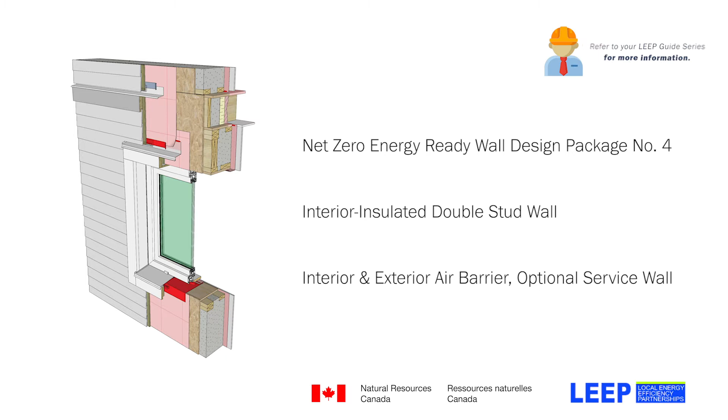So these guides, along with good process, all of a sudden, high performance is easy.

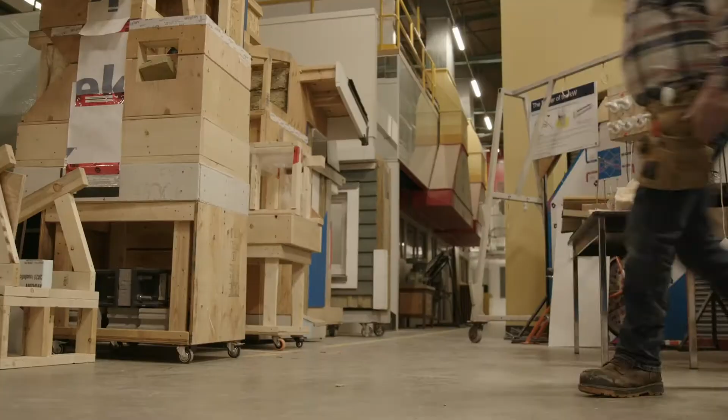You know, this rethink towards net zero is rethinking a lot of the traditional building enclosure assemblies and building them better. I get excited, but I also get depressed. I'm depressed because I'm old. And if I was younger, I would embrace this opportunity for this change. I see the young builders, and to me, I get excited for them.

Morning. How you doing, Graham?

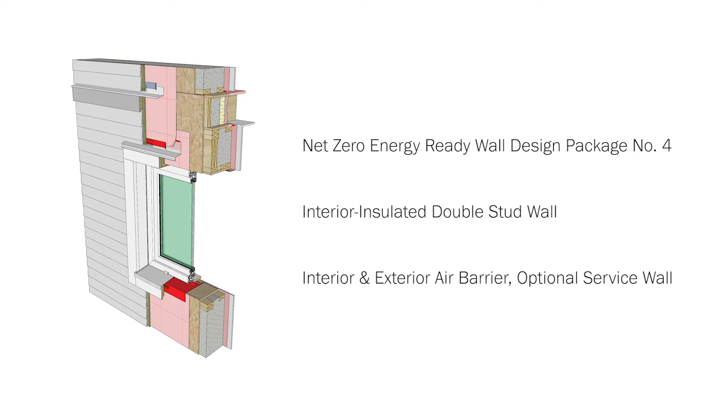All right, James, what we got here is LEEP wall number 4. And LEEP wall number 4 is a deep or double stud wall with cavity fill insulation, no exterior insulation in this application. And the way we're getting our R value towards our net zero targets is we're making this wall fatter and fatter and potentially adding in a service wall, an additional wall on the inside.

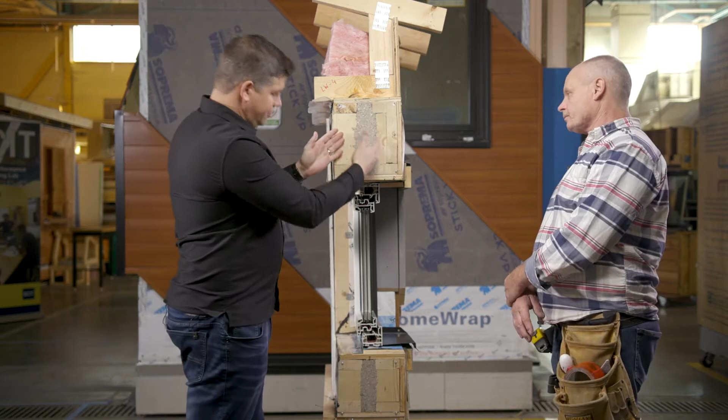So the traditional approach to this double wall is 2x4 framed walls. The cavity is filled with insulation. We'll get into the insulation, and you leave a gap between the two stud walls to get your R value. So you need more R value, you just increase the gap. Sure. And so when you imagine this during construction, you've got double wall framing. It's going to be very difficult to cut and fit in batts, just from an installation standpoint.

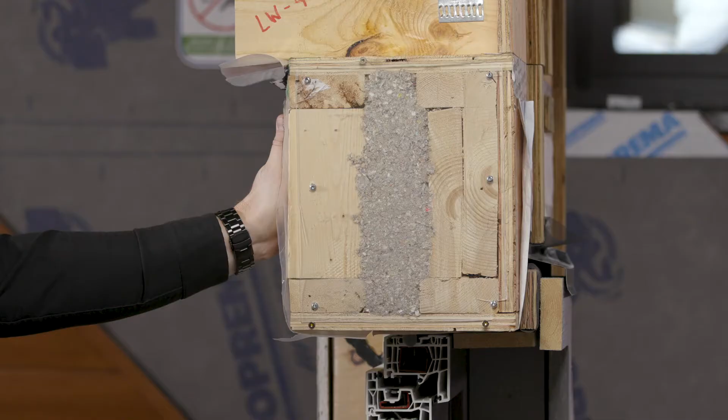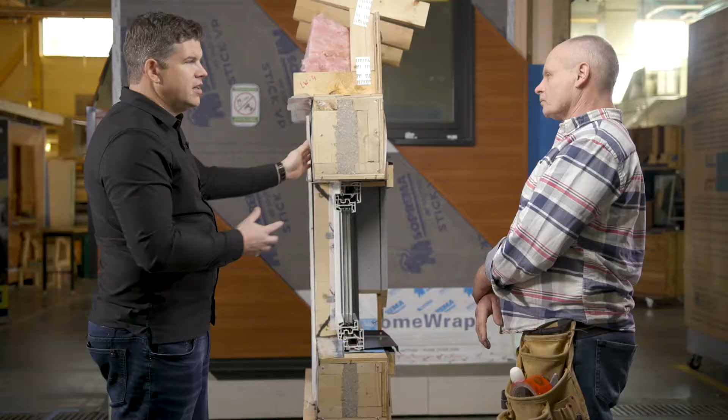So typically this cavity is filled with dense pack cellulose. You can use dense pack fiberglass, you can use open cell spray foam, or all sorts of variants of this. But with dense pack cellulose, you're packing this into this wall assembly here, usually 3.5, 4 pound density to get enough density so that it doesn't settle in this cavity. Yeah. You can see here we've got a cutaway showing the cellulose packed in for this mock-up. That's friction on the side, just on the density.

Yes, you need to be tight, and it should be as tight as your mattress. I mean, this is not quite tight enough here, and if this mock-up were to sit for a long period of time, that insulation would probably settle down.

Yeah, I'd need a new mattress. Yeah. You'd be sleeping on the floor, yeah.

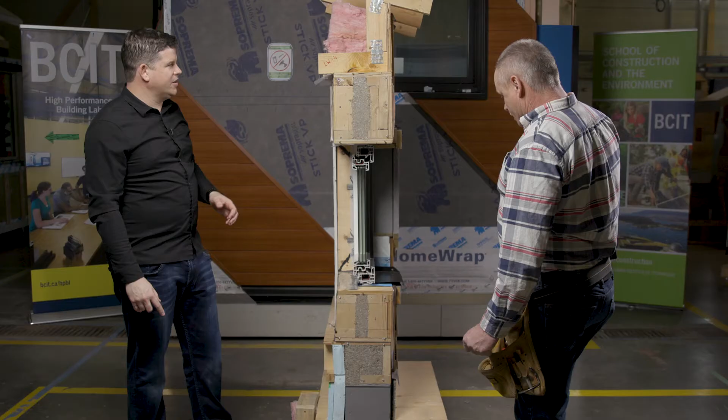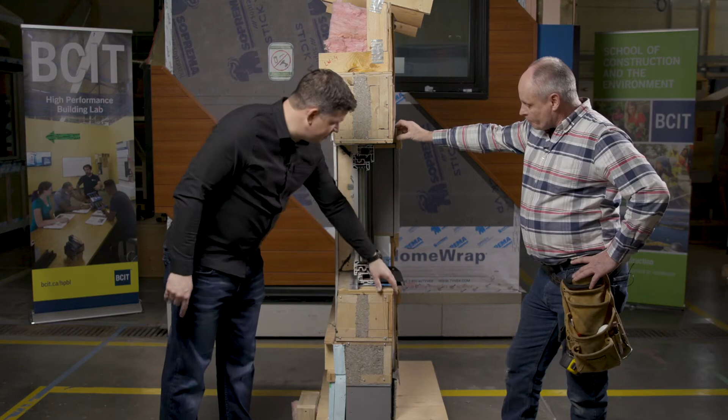James, we're at wall 4, and just wanted to clarify some of the questions about air and vapor barriers with a double stud wall. Good idea. Yeah, so traditionally with a framed wall, we put the air barrier and vapor barrier on the inside. And it's no different with a double or a fat wall, right? That's been our past program. Yeah, and although in recent years, we've started to use more modern approaches with exterior air barriers, right? Agreed. So house wrap. Agreed.

Now the risk with making the house wrap the only air barrier in a double wall is that if air gets into this deep space and it's really cold in here, then we can get condensation. And so in a lot of these double walls too, we have cellulose. Now, typically cellulose, we try to get in at 4 pounds a cubic foot. What's your experience getting that cellulose tightly packed into everywhere though?

I find it, and it goes to a basic principle. My experience is the densities are inconsistent, okay? Yeah. The principle that I try to work and live by is everything I do is in front of me. This is a blind install. Yeah. You can't see what you're doing. So you're relying on a density test after. You don't know if it gets hung up or what's happening inside that wall assembly.

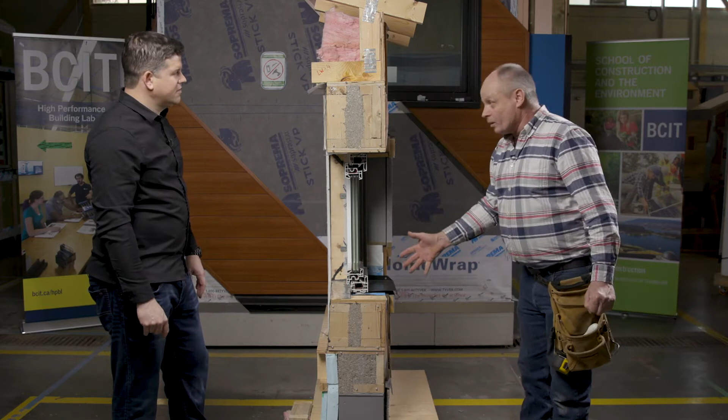It can and has been done successfully for me also. So don't get me wrong. I've had success. But the last job came in at 2.9 and I asked for 4. And I was like, okay guys, it didn't really quite work out. It's very important that we get a good dense pack for convective looping purposes. You can talk about that, convective looping. That's something I read in the guide.

Yeah, so with these deep walls with fibrous insulation, there's the risk that, with cold air falling in the sheathing and warm air rising on the inside, we're going to get this looping inside these wall assemblies where it can bring with it moisture. And so it's important to have interior air tightness.

The other thing the interior air barrier in this case is also doing, this is plastic. We're using polyethylene or potentially a reinforced polyethylene, another product here on the inside. This is also performing the function of our vapor barrier.

So it's the same as before. It's an air vapor barrier. And it's only an air barrier because we're doing a really good job of detailing. We're going all the way from our foundation. We got styrofoam on the inside of our concrete wall. We've taped all the joints. We've taped the joints in our rim joists. We got the transfer through the acoustic seal to the poly into our windows and tying into our window frame here. That's fine, but my experience is that's also difficult with all the amount of penetration on the inside.

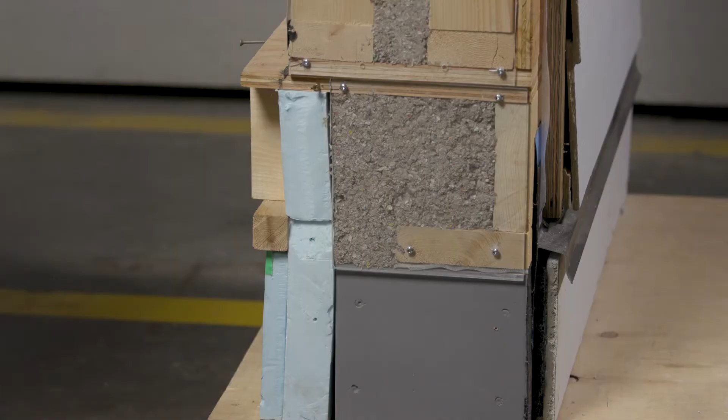What else can you do? That's if you want to make it simpler. Yeah, and what we're really seeing with a lot of the higher performance double walls, with passive house and net zero projects, is in almost every single case, builders build a third wall, a second wall on the inside, or a service wall, right?

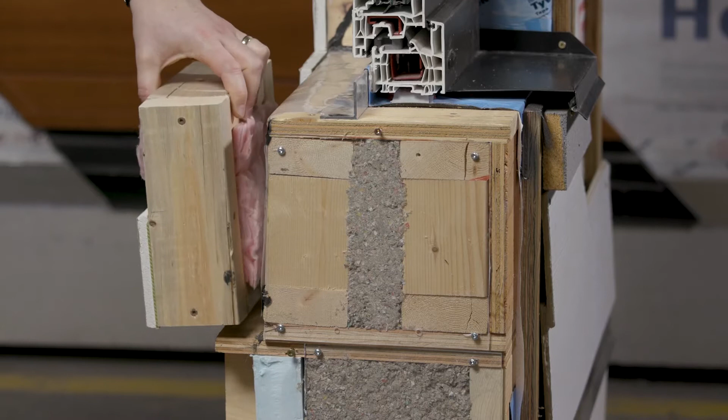And the idea with the service wall is your air vapor barrier is left here. And a 2x4, 2x3, even 2x2, it could be vertical, it could be cross-strapping, could be whatever, essentially built on the inside here. You can put a bit more insulation for R-value, why not? But you run all your services in here, and the air barrier doesn't even get touched. Well, that's a good idea. I suppose you could put OSB or something here also and keep it in hardboard, or is that necessary?

Yeah, actually, a lot of builders are also looking at alternates to plastic, right? That's why I asked the polyethylene question. That's what I'm hearing. It hasn't served them well, so they look at OSB as a rigid air barrier for higher performance, and it can seal up and detail really well. OSB is really unique in that when it's dry on the inside, it's a vapor control layer. It's a vapor retarder. It's about a perm when it's dry. And most OSB is actually airtight, or airtight enough. Well, that's good. So tape the joints and we'd serve what we need. Yeah. Thanks. I appreciate that.

The concern that a lot of builders have is, well, if I have sheathing on the inside, why do I need sheathing on the outside? The way this wall works to get your R-values is you increase the thickness. You look at the type of insulation, and in the LEEP guides, we've covered different types of insulation and gaps. If you want to even use 2x10s or 2x12s, or if you really wanted to go crazy, you can use that as well. And we'll get into some of the details later on.

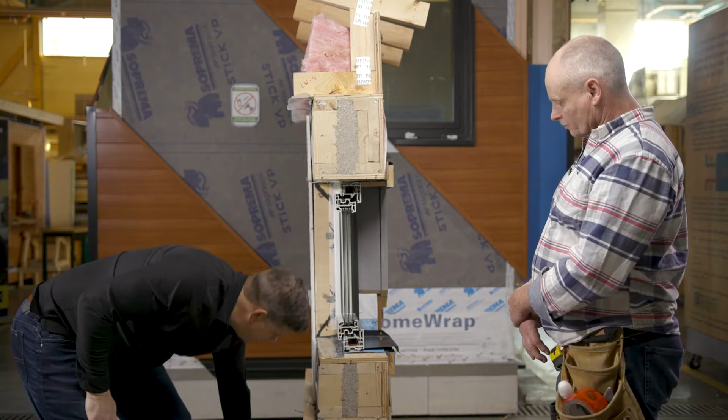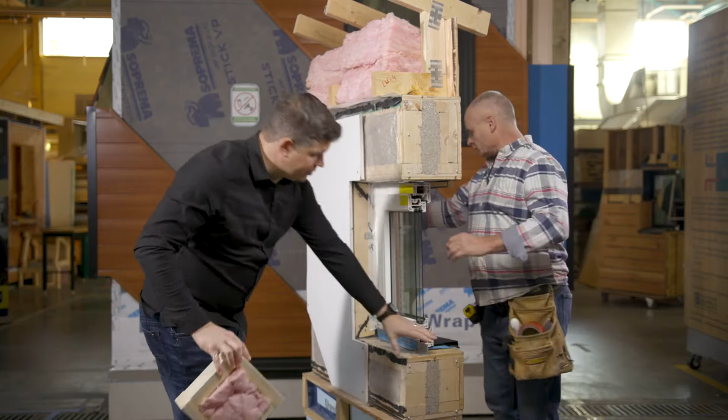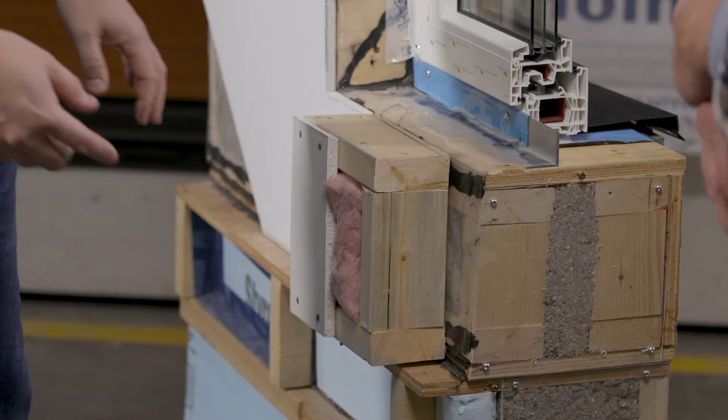One of the other ways to increase R-value is you build a service wall on the inside of this wall. So if we look at the detail here, we got our double wall. And so we got, say, R30 here, and we need another R10. We just build another wall on the inside here, and we get R10 on the inside. And all the services run here, so we don't affect any of the air barrier. Yeah. Or minimally affect the air barrier.

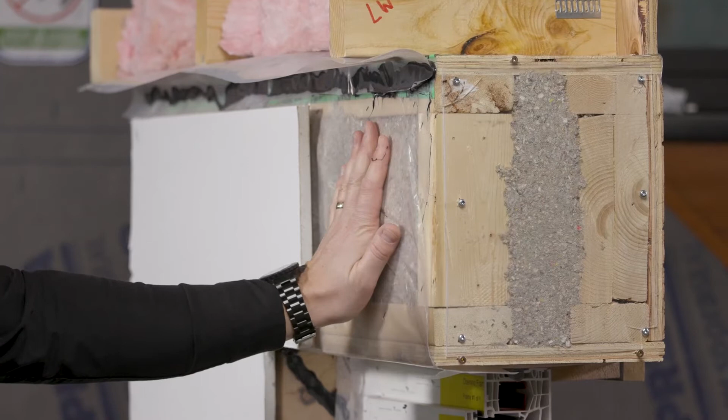Yeah, let's talk about the air barrier penetrations. There's an interesting air barrier approach here. Yeah, so with our deep walls in Canada and the cold climate, we need some degree of air tightness on the inside. We can put the air barrier for the building anywhere: on the inside, the outside, somewhere in the middle, a whole bunch of different locations, right? The common approach with the deep walls, you want to get a primary air barrier on the inside.

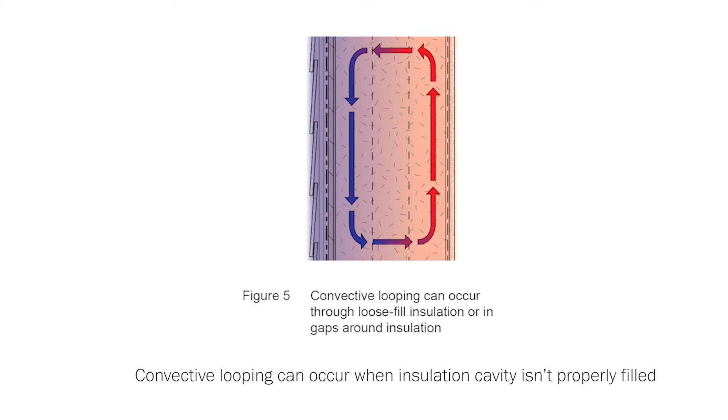With a deep wall you don't want warm, moist air getting in and convecting. The air will flow through this, hot air rises, cold air falls, and you get convective looping inside these deeper walls, especially if there's gaps in the insulation. So you want an air barrier on the inside of these wall systems, so you're managing that air flowing in there. Wouldn't a dense pack itself prevent that convective looping, if you manage to get the density everywhere? Definitely. Yeah, and one of the reasons people use dense pack cellulose is it does fill all the gaps.

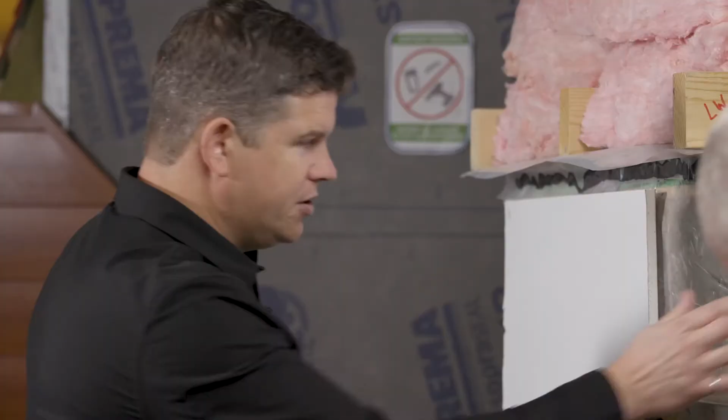If you're using batts and you're shoving it in there, you're going to end up with some gaps. And those gaps are bad to the performance thermally, but also from a moisture standpoint. Yeah. So with the air barrier on the inside, one of the challenges, as you know from traditional construction, is you've got plugs and other penetrations and outlets through this wall. Lots of them. Lots of pot lights in the ceiling, right?

And so one of the strategies we've seen quite successful is you keep the air barrier there, whether it be polyethylene, reinforced polyethylene if you're blowing in behind cellulose, or smart vapor retarder in some cases. There's a whole bunch of different products you could use here. But you're going to use a blow-in system that's conducive to the mesh or poly or whatever you're using. That's right. Because there are different ones, right?

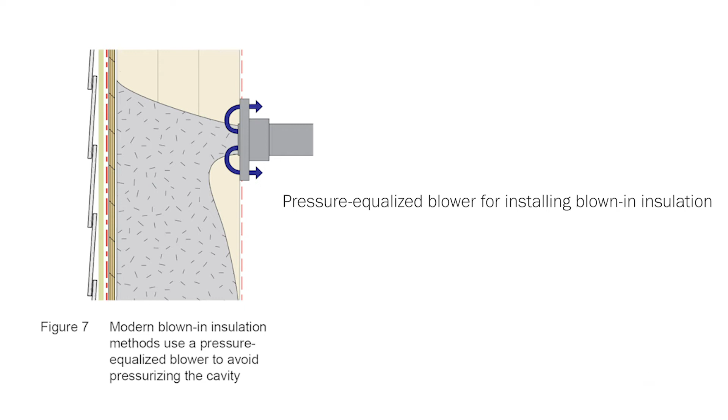That's right. If you're blowing in cellulose, traditionally you need a mesh here. It's air permeable. You blow it in, and then you have to put another poly vapor barrier, air barrier, afterwards. There are systems now that allow you to blow in. They basically neutralize the pressure, so air release at the same time as blowing in, so you can use something like this or maybe what we'll talk about down there. That's right. And so the polyethylene's a good air and vapor control strategy for this wall.

Right. We also see a lot of builders using OSB or plywood sheathing. OSB or plywood sheathing, when they're on the warm, dry side of this wall assembly, actually function as a vapor retarder. They're actually smart vapor retarders because the permeance varies with humidity. That's right, and actually on the outside, it's quite vapor open, but if you use it on the inside, it closes in, right? And so we see a lot of walls where you use OSB or plywood instead of the polyethylene as your vapor control and your air barrier.

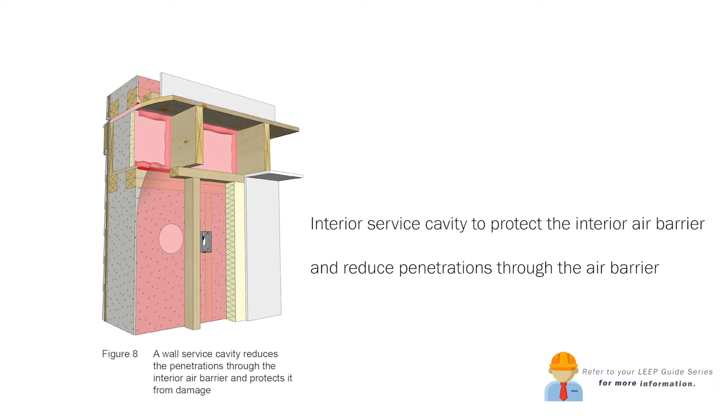So one of the ideas with the service wall is you've got all your insulation in here, and then for all your services, plumbing, you don't even need to run your plumbing through the interior walls. You can run it through the exterior walls if you wanted to. All your electrical outlets, everything, you plug it into this wall here, and the air barrier is now protected by this service wall. Yeah, right? Except for the occasional penetration, which you can then detail. That's right. So that's the idea here.

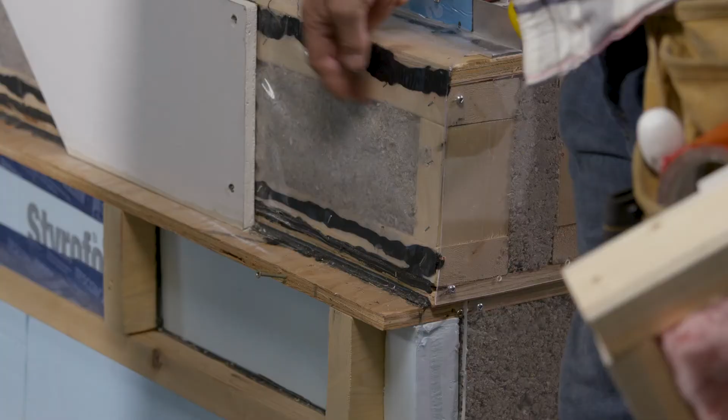So when you're looking at this wall assembly overall, the R per inch of the cavity insulation is lower than the rigid insulations we covered with the other walls on the outside. This is 3 to 4 per inch. I noticed something on the inside here on this mock-up that I think shows a couple of different approaches, where we clearly see the interior air barrier coming through and connecting to the window, to the plate here. But down on the service wall, we also see a compartmentalized approach for this area here. Can you explain what the concept is? Is that to help reduce the potential for convective looping?

So for this wall assembly, to get the R value you need, whether you're building in Winnipeg, BC, wherever you are, you're going to be adjusting the depth of this wall. Typically the R value per inch of fibrous insulation like cellulose and fiberglass is 3 to 4 per inch, maybe a bit more than 4 for some of the high density products. And so you can do quick math to figure out, if you need R40, what that thickness is going to be with all the thermal bridging and everything in there. So these walls tend to end up being pretty fat for higher R values.

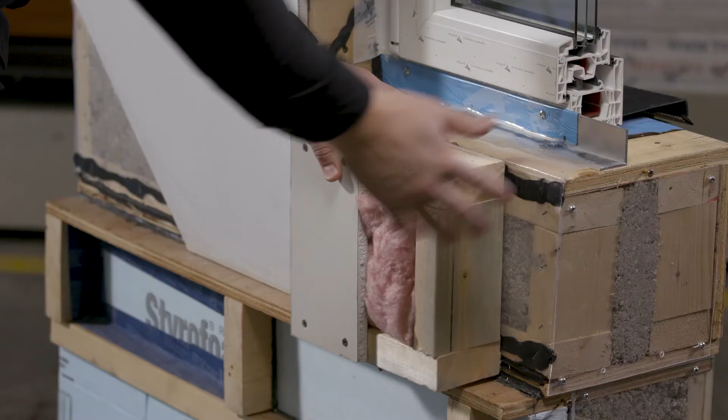And so when you think about the service wall and other cavities, you end up with a fairly thick wall. What you're trying to do is minimize the amount of thermal bridging through all the wood. And that's why you tend to have a gap between your double walls there. And then the service cavity wall here will be pretty lightly framed. You don't need all the extra framing since it's not supporting the rest of the wall. And the inner wall can be like 24-inch centers, as long as the openings line up and everything like that.

Yeah. And this would be your structural wall on the outside. Yeah, that's a good point. Yeah, so typically the exterior wall, the exterior framing, I should say, is your structural wall, and the interior is tilted in after. Right. And using the plywood as your plate connections. That's right. Between the two walls.

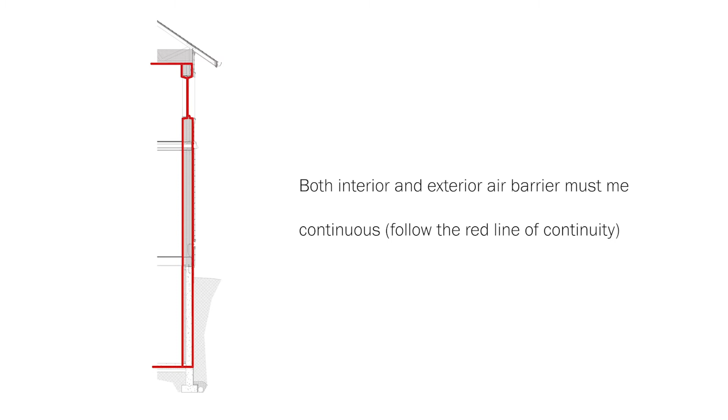Yeah. So on the mock-up here and then the guide, we talk about 2 air barriers. And the reason we've shown 2 air barriers is we want interior air tightness. But we also appreciate that a lot of builders are getting really good at building exterior air barriers really tight. So using the house wrap or the sheathing as the primary building air barrier. And this is really in the inside for your walls for keeping that convection from happening, but also could form part of the overall strategy.

So what you'll see in the details is you've actually got exterior air barrier details here and interior air barrier details. So we're going to go spin this around. So on the outside of this wall assembly, to a builder, it looks exactly the same. You wouldn't know looking just at this what the R value is in behind here. And so one of the benefits of this deeper wall system is on the outside, and what we've got shown here is a rain screen wall system. On the outside, it's pretty traditional.

We're showing a rain screen wall in the LEEP guides for moisture reasons. Right? The main reason is we want to provide a bit of extra drying capacity here. When we add more and more insulation on the inside, that sheathing gets colder and colder. Sure. And so it's at risk of condensation from air leakage or vapor diffusion. So we want to have that outward drying capacity.

But also if we get rainwater leaks, say around a window flashing detail, that rain screen space and the cavity and the airflow and the drainage that's provided, which is common in wetter parts of Canada, provide that benefit. So when we switch to these deeper insulated walls, we're going to see a lot of the time rain screen type cladding attachment or systems. Which makes sense. If you increase the risk of something, then you should provide something that can manage that risk. And so if you can have potential moisture or issues of condensation, you put the rain screen on. It's really quite simple to do.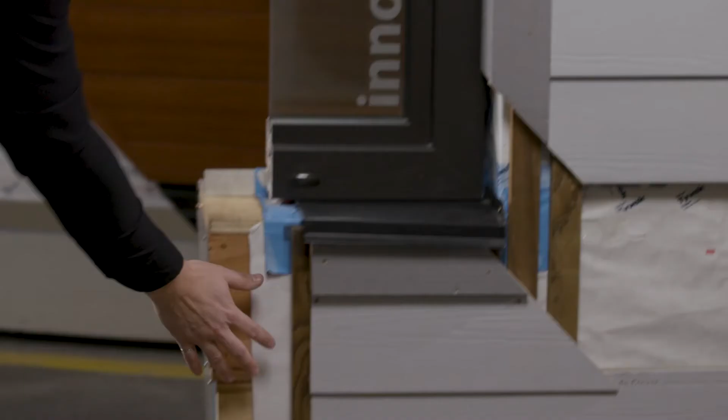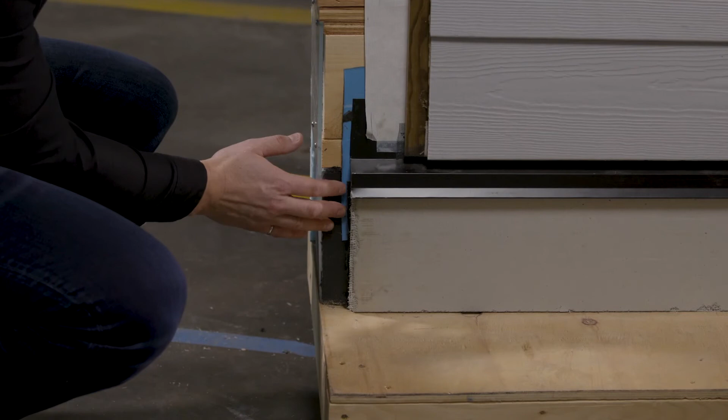Yeah. And so when you look at your details here, if you're familiar with house wrap as an air barrier, you can see that starting here at the foundation. In this particular wall, we've got a concrete foundation wall with potentially a damp proofing on it, or just bare concrete. We've got a peel and stick transition to go from the concrete to the wood. We've got a flashing in here that we've taped, or we could seal it to the flashing, but essentially transferring the air barrier from the concrete to the peel and stick through the flashing into the house wrap. And then we've got air tightness into our flashing around our windows, window flashing details all the way to the top of the wall. Back through.

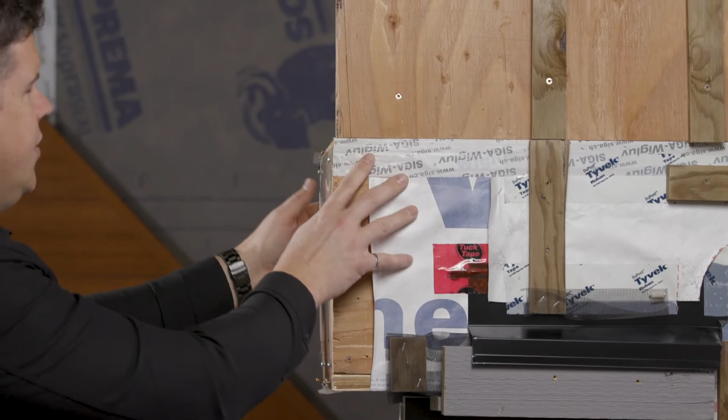Yeah, and so with the double wall here, there's many different ways to frame a double wall. If you're doing 2 2x4s and you wanted to tilt them both up at the same time, you would use essentially plywood plates. So you do it all at once. You could also tip up the outside one like traditional and then infill on the inside, but we've shown it here for the mock-up with plywood.

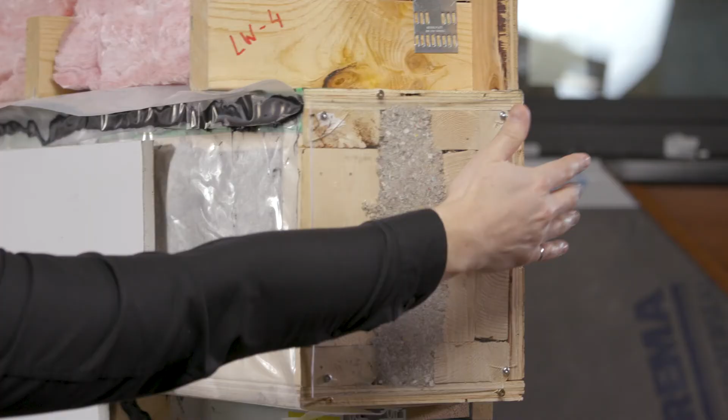And so we need to transfer the air barrier from the outside to the inside of this detail. So we've got polyethylene air barrier in the ceiling, air barrier out here. We do have the polyethylene air barrier on the inside here as well, and that transfers super easy, right? You've got air barrier, acoustic sealant, and then poly, and then the drywall, when it gets installed, squishes it all together. Similar to the plate concept, just using the plywood. Yeah, so the plywood here is transferring. So if this is our primary air barrier, then we've got that transfer through the top.

And it's still wet, thank you. Oh, did you get it? Yeah, I got it. It's an amazing product, acoustic seal, because if it's wet, somebody will find it, okay? That's right. Yeah. It's usually in my hair. So.

There are some interesting air barrier transfers here using the wood framing, etc., at the inside corner. Just shows some of the flexibility. Yeah, great observation. So, working with polyethylene as the air barrier here, most drywall installers are going to shred this when they cut out the drywall around your windows. Rotozips in town, exactly, right?

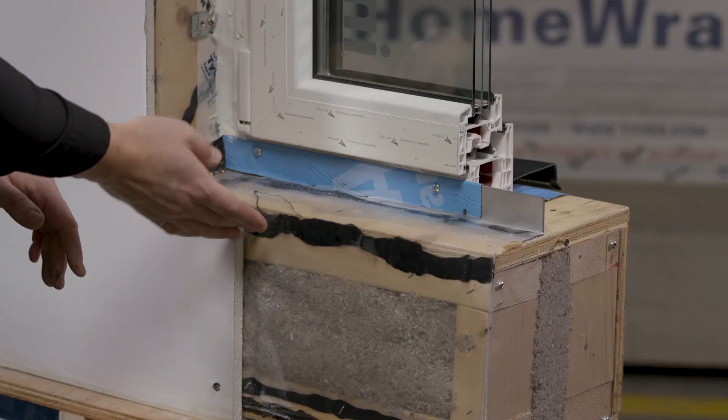So, the acoustic caulk is here on the face, transfer through. The polyethylene should actually run down here to the floor, but there's a couple different ways; you can transfer it through like we've done here to the bottom plate, so everything's sealed up transferring through the wood. It's a mock-up to look at options. So yeah, there's different ways to do that.

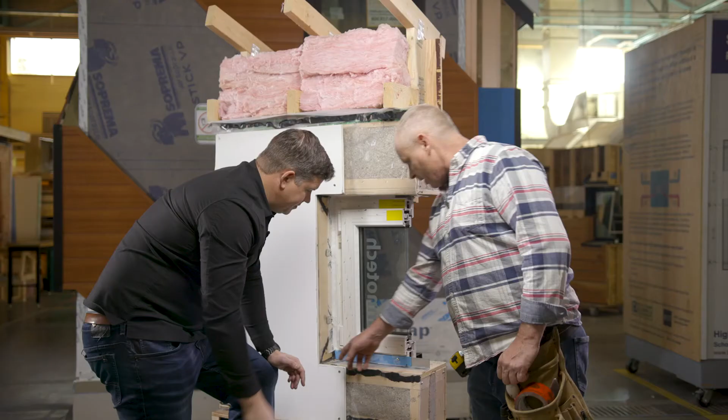But you can see here we've tied in the polyethylene to the wood here, and the idea is that the wood buck here becomes part of the air barrier. Sure. And then you can see the transfer through to the tape here, and then we've got the sealant on the inside of that window frame that's forming the air barrier on the inside. You just X-cut the poly, that's how you ended up with the V's. So it was actually made simple by just cutting the flap in.

Yeah, so you're getting some redundancy in there and really improving your polyethylene air barrier detailing. So you're actually getting transfer into the wood and then into the window. Mm-hmm.

So James, you'll notice this window is installed right in the middle of this wall. Mm-hmm. So one of the nice things about a deep wall like this, and we've used a 3/4 inch plywood buck around the opening. Liner, yeah, liner, basically span across between the outside framing and the inside framing. And deeper wall, just deeper buck. And if you had a service wall, your buck would come out even further.

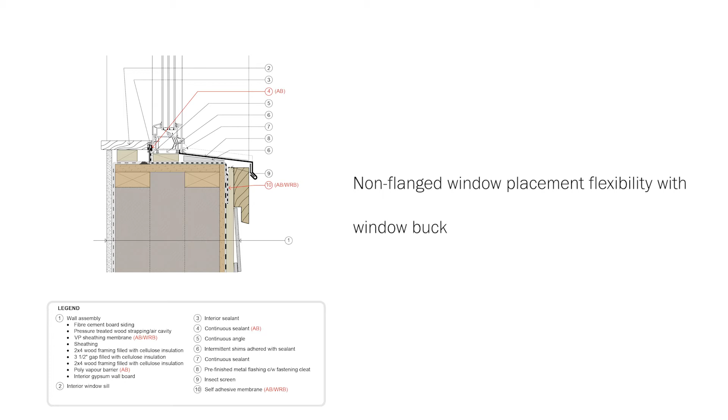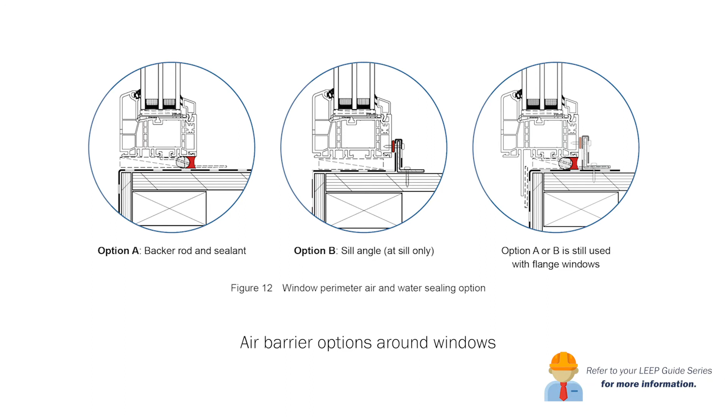Okay, so with our non-flange window here, we can install it anywhere within that rough opening. If you have a flange window, potentially on the outside. If we wanted a flange window, you could buck out this with framing and install the window on that. However, that creates a whole bunch of other complexities. That's a very complex way to go about something that could be simple. That's right. So a non-flange window allows you that flexibility to install it wherever you want in that rough opening.

One thing you'll notice down here is this is flat, right? And in areas where potentially a lot of water is sitting here, we potentially want to add a bit of slope to this. And so we could actually slope the bottom quite easily by putting this on shims, right? Or taper cutting this, or building up on top of the peel. Well, the back dam angle is kind of advantageous. That's right. Drain forward instead of backwards, and on a waterproof membrane, the amount of water is usually minimal. Would dry.

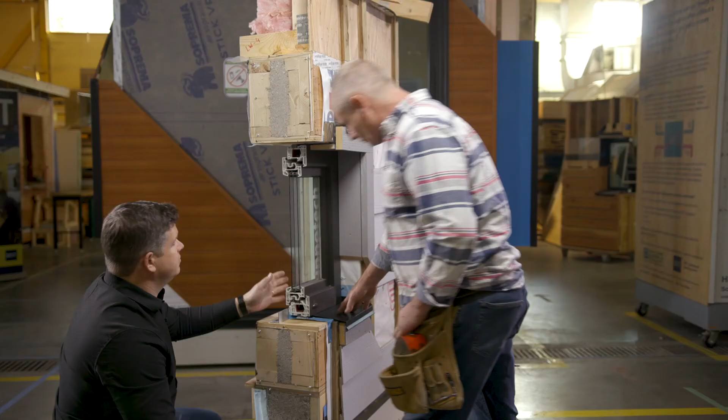So this window here, we've installed it with back dam angle, peel and sticks coming up and over down the face, traditionally wood, and it's got clips on the inside and backer rod and seal. And there's lots of different ways you can install this, but generally you want to get that window in the middle of this wall assembly. That's the best place for your R value, and actually for minimizing the thermal bridging. And attachment is quite simple if you simply have a plywood liner for your return claddings, etc.

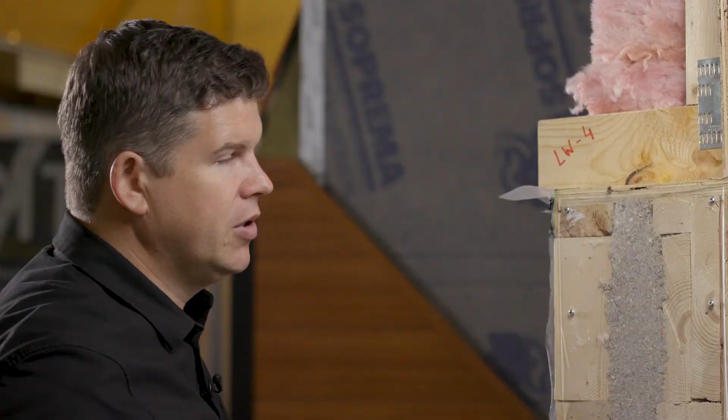That's right. So this wall really takes a lot of traditional approaches, from exterior water and air barrier detailing, interior air barrier detailing. It's just fatter, right? It's stretched out to increase the R value. You're using typically insulations that are lower cost per R value, just because they're fibrous and blown in, versus a rigid product.

When you look at this wall assembly, it's something that some homeowners can even build themselves, right? You look at the detailing here, it doesn't require a lot of special tools, and it's something that you can take on as a do-it-yourselfer even. Yeah, I understand. This wall is built in quite a few places across the country. I believe it's quite prevalent in Alberta.

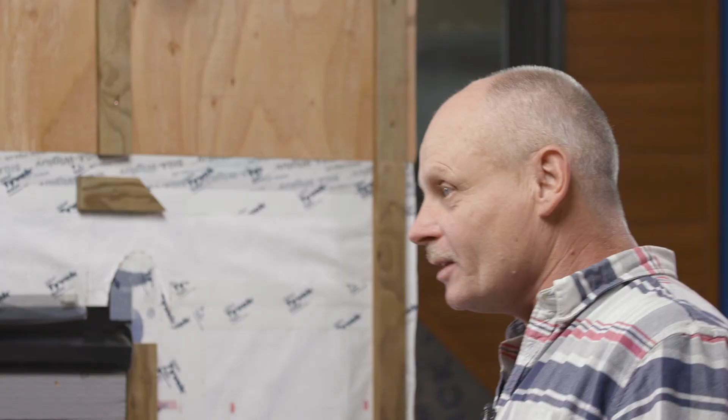I find it just amazingly interesting that across the country we have different wall types and technology and understandings for each of the various regions. It's one wall type across the country that doesn't exist. And so I think LEEP is really helping to unify high performance for whatever you want to build, as a starting point.

One of the good things I've heard from builders about this wall is how cost effective they can make this. A lot of builders see a deep or double wall as a lot cheaper than one with exterior insulation. They do look at the material cost, and this type of insulation is a lot cheaper than rigid insulation. There's still nuances and considerations when you build an interior deep stud wall, which could come back on you. So you really need to understand that.

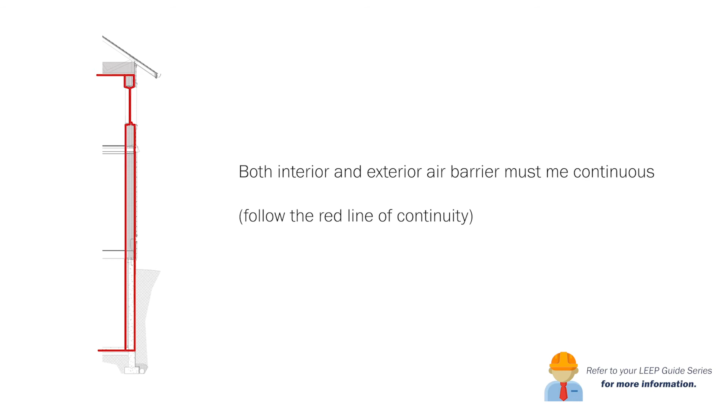Yeah, let's walk through those. It may be cheap at day one, but if it doesn't work well because you avoided some consideration, then it's not cost effective. That's right. So this may be cost effective, but this wall requires very good air tightness. Right, the details on the inside. It's critically important to get the air tightness right. If you don't get air tightness right with this wall, it is at higher risk than an exterior insulation. Yeah, and that was my point.

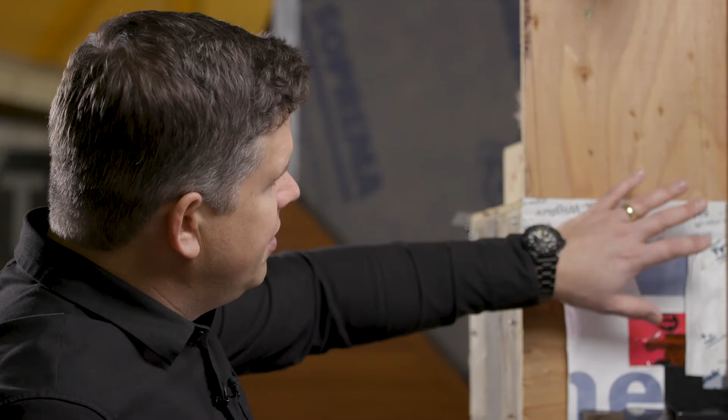So James, you'll notice this wall assembly, we've shown a rain screen. It's a capillary break from the water shedding surface to the water resistant barrier. Provides drainage and drying potential for whatever moisture may, from whatever source, accumulate. That's right. And so the idea with rain screen cladding on this wall assembly is to provide that extra durability to allow drying of that sheathing out. The sheathing is going to be colder and therefore damper with all that insulation on the inside. So in our wetter and damper climates, it's very important to allow that outward drying.

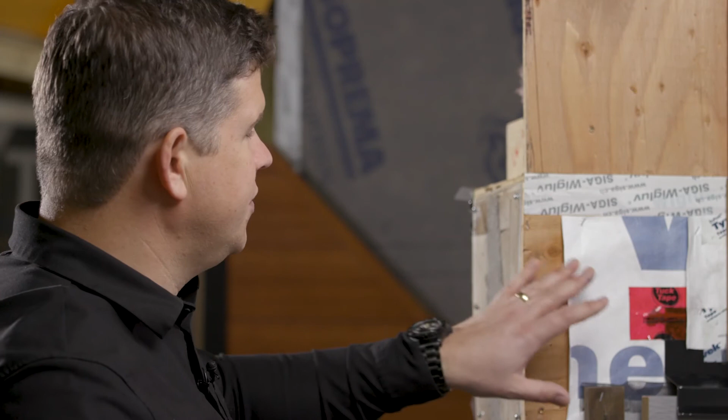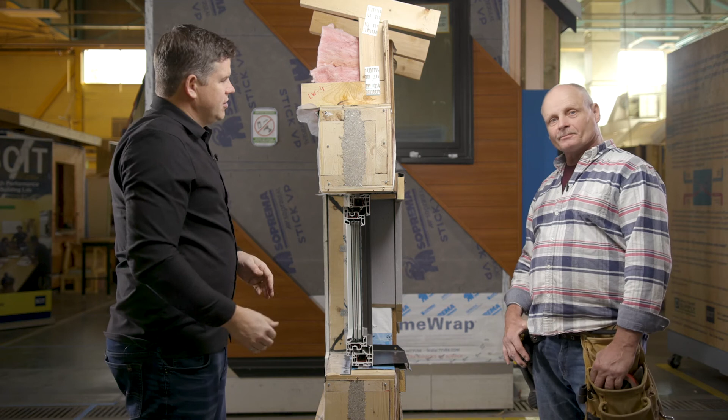When we see double stud walls and deep walls built all across Canada, they're building above code anyways, and we're seeing most of them actually use some sort of rain screen approach, because the builders appreciate that they need some drying there and some redundancy when they're building a higher performance wall system. So in our deep and double walls, from a building science perspective, we've got our sheathing on the outside, our vapor control and air control on the inside. Outdoors cold, warm indoors.

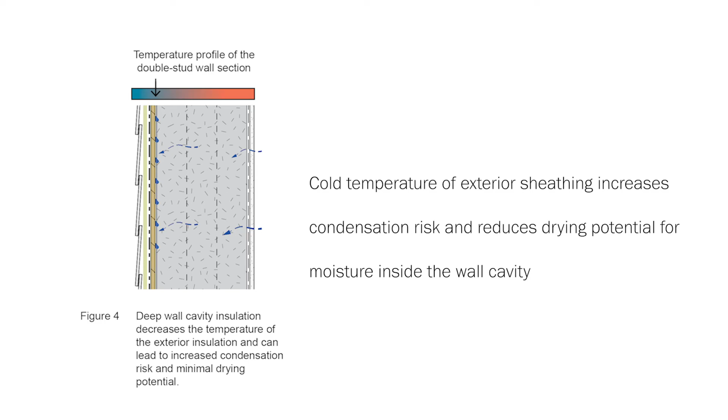And so this sheathing with all this insulation on the inside is actually quite a bit colder than we used to have with our R20 or R22 batts. We've got our R40, R50 on the inside now. That sheathing becomes appreciably colder and closer to the outdoor conditions. As that sheathing becomes colder, the humidity goes up, and so the moisture content in that sheathing tends to be higher in these double walls or deep walls than a traditional assembly. So because that sheathing's colder with higher moisture content, any small leak now can push it over the edge. So this assembly, if you're not careful with air and vapor control, can be riskier than a traditional approach.

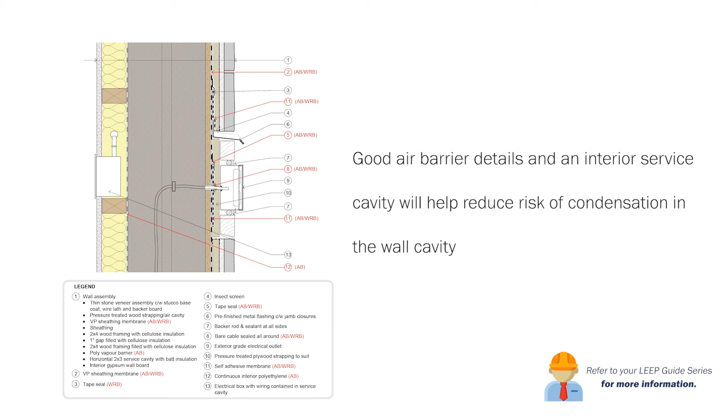And so that's why we had taken all these steps to put improved air barrier detailing. That's why we'd look at using the service cavity here. The idea with the service cavity is it protects the air barrier. And the rain screen. Exactly. And so the LEEP approach to this wall has been good air barrier details. You can protect your air barrier details with that service cavity on the inside, especially as you start needing R30 to R40. It's going to make sense to do this anyways.